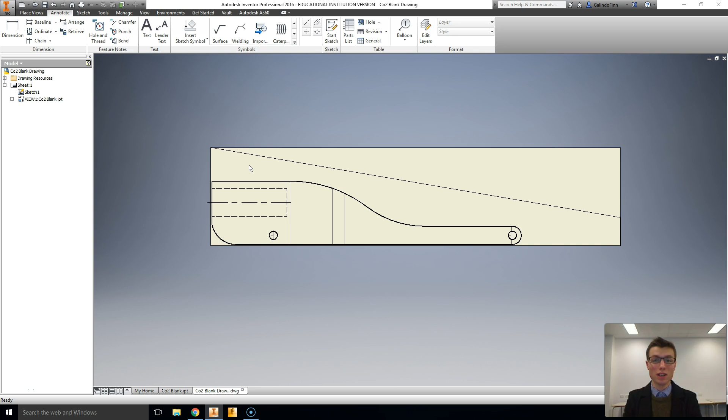Today we're going to be doing another Dragster tutorial, this time with our top view drawing. So to start with, you should hopefully have finished the previous video which showed you how to create a side view drawing that should look similar to the one on my screen currently. And now we're going to create a second sheet.

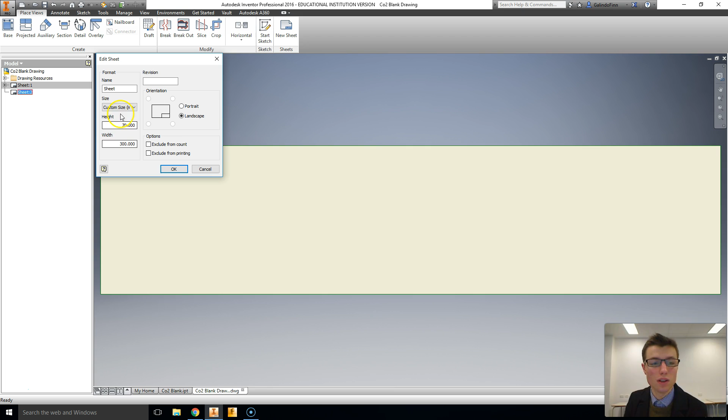Now to do this, I'm going to be going to Place Views, and then under the Sheets panel here I'm going to go New Sheet. Now this second sheet I need to modify, so I'm going to right click and go Edit Sheet, and I'm going to change the size of it. If you remember from our top view, and this is the top view sheet, we can change the custom size, making sure it's in millimeters, to a height of 45 and a width of 300, and that will give us our view from the top.

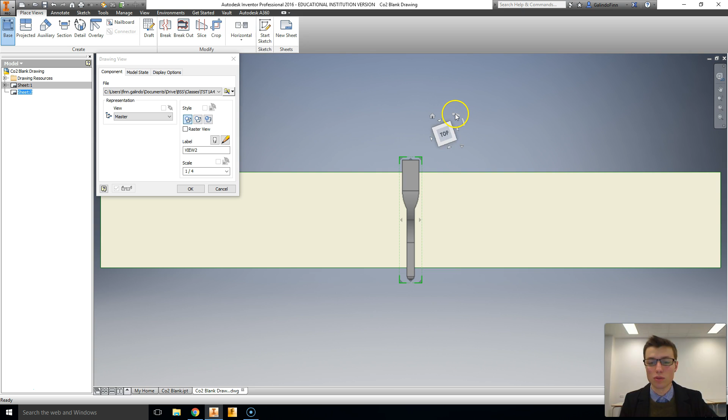Clicking to the Create panel on the Place Views tab now, we can select a base view, and we're going to orientate our vehicle so we can see it from the top. So I can see it from the top here, but it's not the right angle, so I'm going to rotate it. And now it's starting to look like it's not quite the right size, so I'm going to make sure the scale here is selected as 1. Okay, and you can see that that is now more accurate.

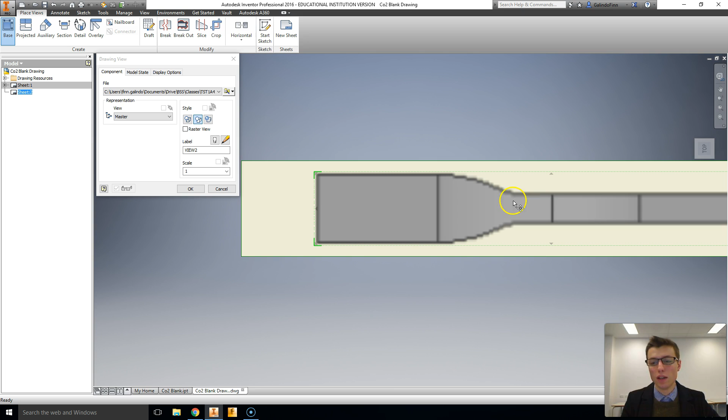Now for this, automatically this is put very carefully in the center, so I want to be really careful when I move this, that I move it just straight to the left. And basically I want to just click and drag it as close as I can to the middle, which isn't very easy to do, but you want to try and make sure that you've got an equal size between the top and the bottom.

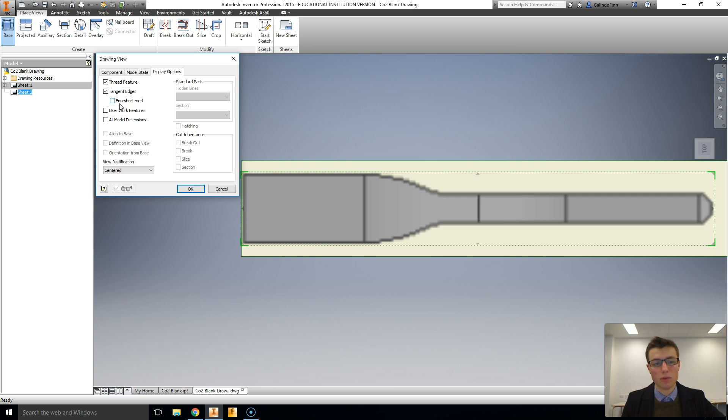Making sure that you've got the hidden lines selected here, and the model state and the display options are the same as I've got on my screen right now. You then just want to click OK, and you'll create your drawing. Now in this view you can see the axle holes here, they're like straight through tubes, and the canister housing hole here. I want to put a center line into both of these.

So to do so, I just want to go Annotate, and I'm going to go to the Centerline Bisector, and I'm going to select the two sides of the center CO2 cartridge. Then I'm going to do the two sides of the axle hole and the two sides of the axle hole at the front as well. And you can just finish that by clicking right-click Escape.

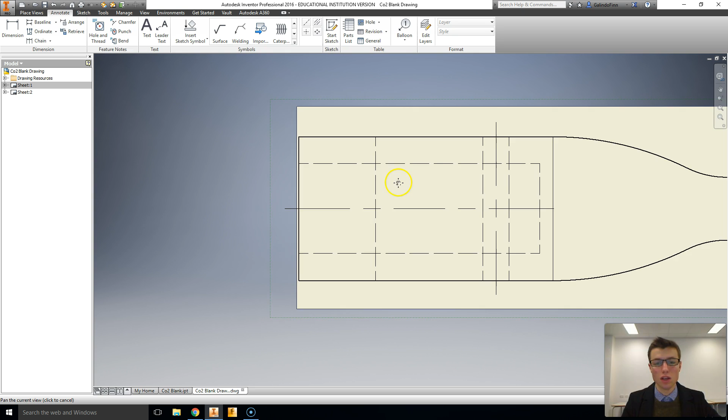I now just want to move this ever so slightly back, slightly further, so it's really near the edge, and we've only got a small gap there. And I just want to have a look carefully, maybe zooming in slightly, to make sure that this is centralized. Okay, it's pretty close. It needs to be as accurate as possible, as accurate as you can make it, really, judging it by eye. That there probably is slightly more accurate. And that's all we really need to do in this sketch.

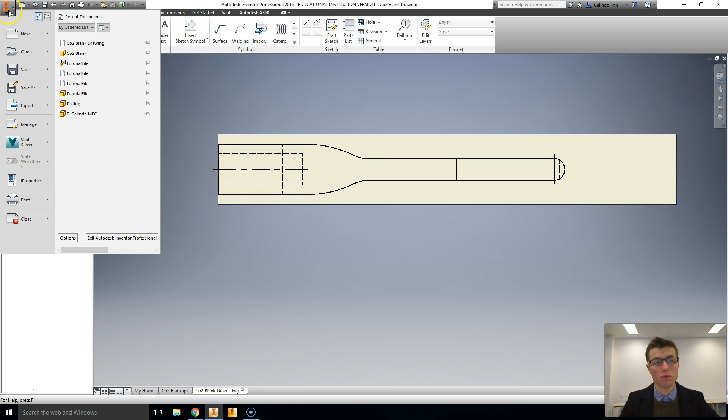I'm going to click Save, so I've saved my two sheets here, and I'm now going to save them and export them. So I'm going to click iPro, I'm going to go Export, and I'm going to export the file as a PDF format. And I'm going to go CO2 blank drawings, saving it as a .pdf file, and I'm going to click Save. Now this should create two drawings that look like so.

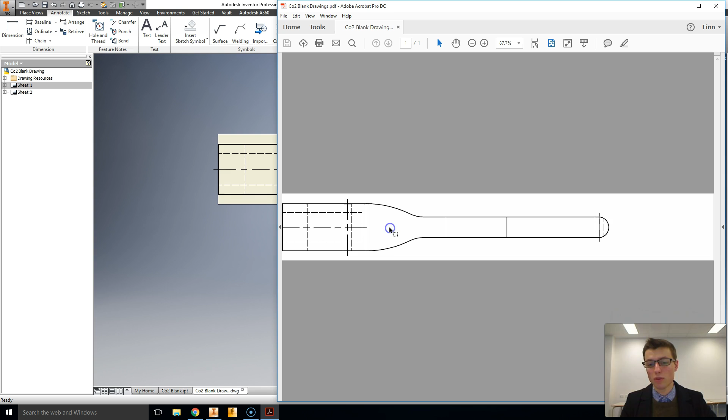Now it only does one at a time, so this is our top view. You can see it's pretty much our perfect dragster here, and that's pretty spot on. Very happy with that. And then we're going to go to the other sheet here, our first one, and also go iPro and Export PDF, and this time I'll rename these, instead of just drawings I'm going to call them the views. Side view, and we want top view.

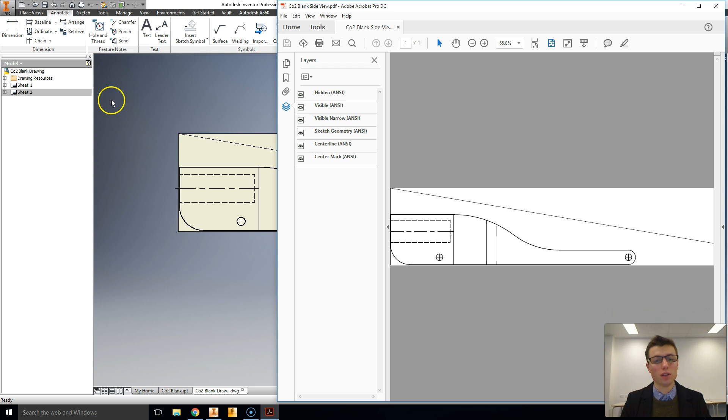Perfect. So once you've got those files, you'll probably need to be uploading those to a Classroom upload point through Google Classroom. So check that out and just follow the upload tips to be able to add that to the assignment. Well done.